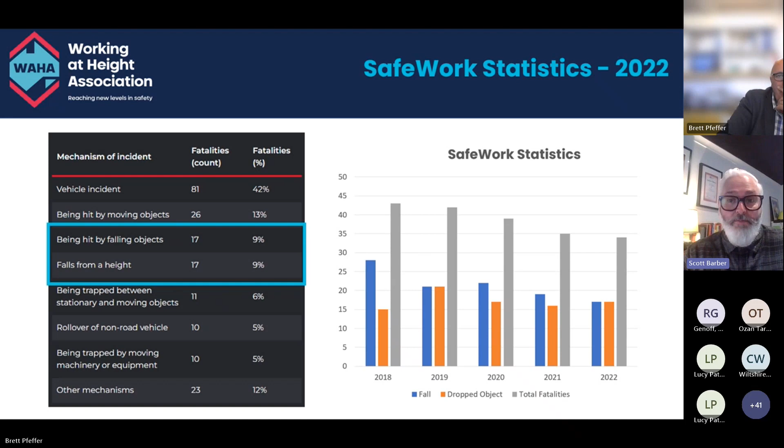But when you consider the amount of emphasis we're placing on this from an industry perspective, from a regulator perspective, obviously there's a gap in terms of what we're doing to really see that drop down to what it should be, which is very low numbers, if nothing at all. So, next one.

So obviously what we're seeing, and why we want this collaboration piece, is that we're not seeing a strong enough shift in that behavior. And we see that as a behavior piece - that's what the indicators are showing, that there is decision making in place around whether systems should be put in place, what equipment should be used, and then how to use it. So how do we address that?

As I mentioned, despite that focus from the regulator and despite the amount of information being provided by those regulators, there seems to be something missing in terms of the education and guidance frameworks. This is what WAHA are trying to do with that collaboration model - provide some more practical guidance tools to help initiate better practices.

With the different associations and so on, what happens is we're not seeing patterns of use, and that's what we're trying to bring together. If we understand the patterns in terms of the nature of the injuries, then we can be more effective in addressing those directly. And then that combined voice means we can actually do things about that as well, and work with the regulators to develop better policy and work around best practice work methods to facilitate those changes if we can find those patterns.

And of course, the education piece - that's an empowerment piece. If we can use these different groups to expand that message and address some of those areas, because not knowing what you don't know is a big problem. And even thinking you know something, but not genuinely understanding what that issue is, is also problematic. So if we can reach a greater stakeholder base, a larger audience with better, more relevant information, then that's when we're going to see more positive change. Next one, please.

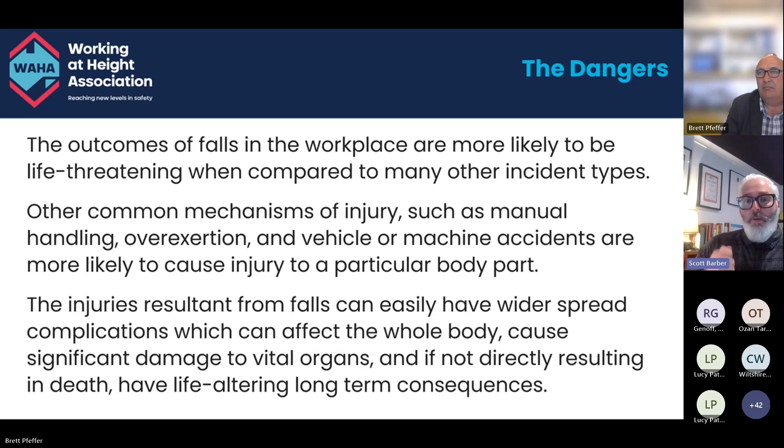The outcomes of falls in the workplace are more likely to be life-threatening, even though they account for 18% of fatalities. Compared to other injury types, the potential fatality is so much greater, which is why a lot of industries and organisations, including the Water Services Association and the Australian Rail Association, see it as a fatal risk factor and one of their top 10 fatal risk factors. When looking at other injury mechanisms like manual handling and overexertion, there are a lot of injuries that can occur in those spaces, but they don't generally have a high expectation of resulting in a fatality. That's why there's such a key focus on this particular area.

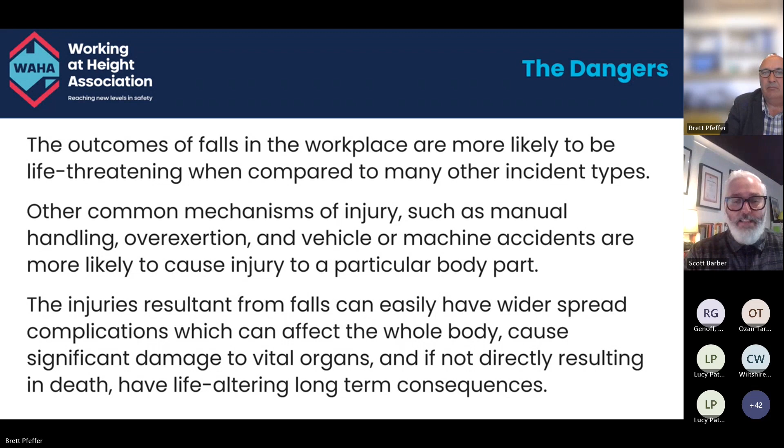Despite advances in equipment, despite legislation being focused on this, despite revisions of standards, there's actually a new standard out for review now if anybody's interested, the 1891.4, which has just gone out to public comment, and that's on the selection and use of equipment. That's quite a relevant one to end users, probably the most relevant one out of all the body of 1891 standards. That's on the Australian Standards website now, and you'll see if you're following WAHA, there's a link to that on our socials and our website.

But despite that, the injury piece is, from anecdotal evidence, which is what we're working with a lot of the time, either static or increasing. And of course, the cost of business in terms of gaining compliance is ever increasing, so the investment in training and resources. We need to make sure that if we're going to invest in that space, the training is relevant and the adoption of those systems we put so much time and effort into developing, be it equipment selection, training, or designing safe work methods for particular tasks, there's a huge investment of time and energy into those spaces. We want to make sure that investment is actually going to deliver a return as far as a safer and more capable workforce. So the next one.

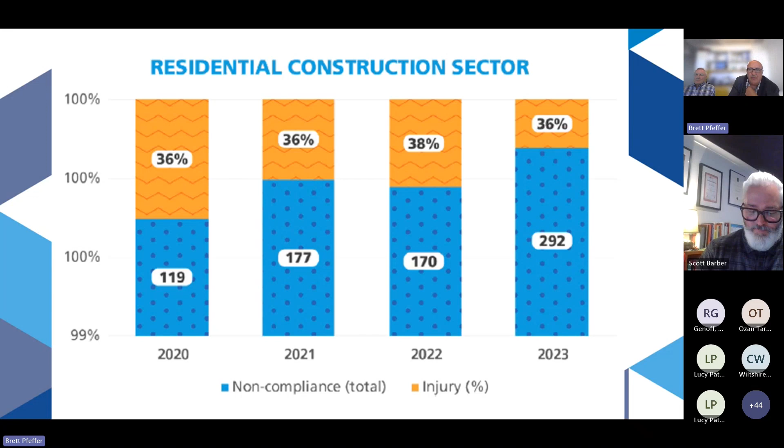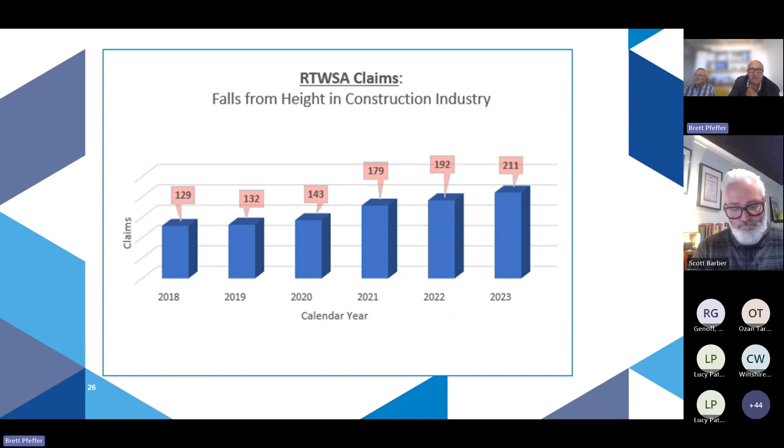So we're lucky enough to get some Return to Work data for you. That shows the previous 6 years, and you can see that through construction, not just residential, it's slowly and continuing creeping up, no matter what efforts we put in place to minimise that.

So before we look at the 2023 campaign findings and trends, I'll give you some background on our South Australian legislation. The model WHS laws commenced in Australia in 2012, but was delayed in South Australia by a year, so we didn't get it until 2013. When the laws were introduced, the regulations associated with high risk construction work activities involving a risk of a person falling more than 2 metres was changed to 3 metres.

This change was made by the residential sector in the misguided belief that no controls were required to minimise the risk of a fall to 3 metres. And as most of us know, most fall injuries are below 3 metres.

Further to this, in 2014, the housing industry lobbied and got the Construction Work and Preventing Falls in Housing Construction Code of Practice disallowed, stating the codes were too prescriptive. Again, the sector did not understand that the absence of the codes did not eliminate the obligation to comply with the laws. It only removed the housing industry's guidance on how to comply with the law.

Then lastly, in 2015, the housing industry lobbied for an increase in the monetary threshold of a construction project from $250,000 to $450,000, to ensure housing projects were not subjected to additional safety requirements as a principal contractor. Again, this is a misguided belief that by raising the threshold, the obligations and responsibilities of the builder would be diminished.

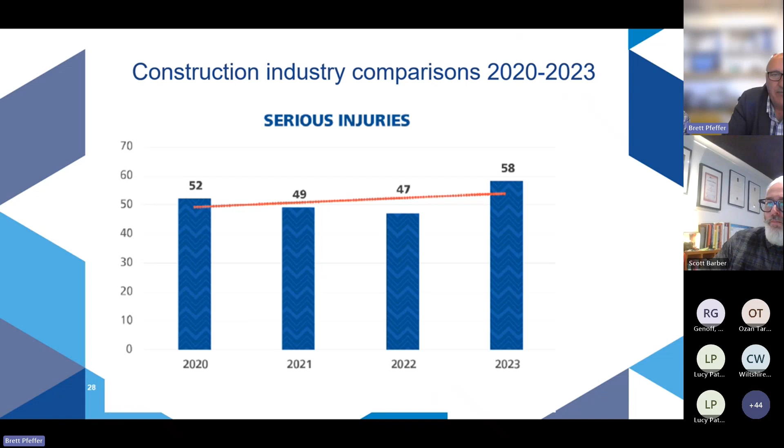And I always say for every prohibition, every improvement has either saved a life or actually prevented a serious injury. So that's a pretty high stat there.

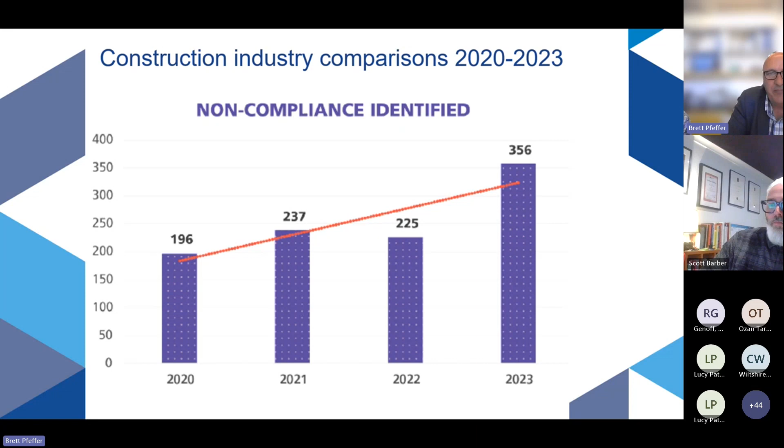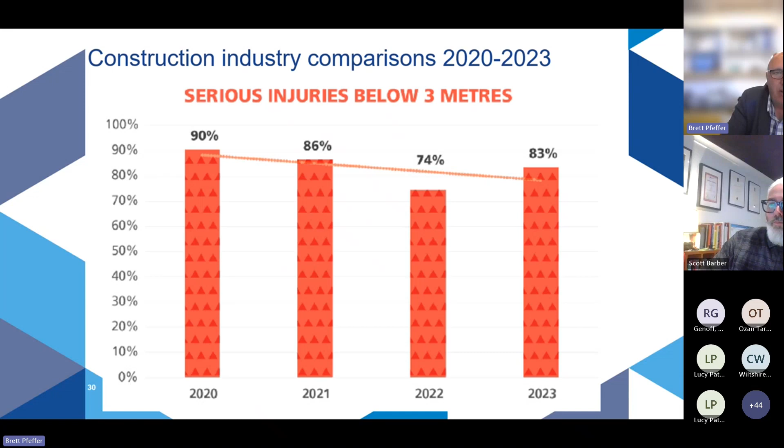While we saw a continued decrease in the number of serious injuries below 3 metres between 2020 and 2022, in 2023 we saw an increase back to 83%. I chose 3 metres because that's the threshold for SWMS, and you can see a lot of serious injuries are below 3 metres.

Managing high-risk construction work requires a safe work method statement. SafeWork has developed a lot of guidance material, including a recently published SWMS template, and SafeWork Australia has developed an interactive SWMS guidance tool with step-by-step information, videos and examples. Paul will talk about that later. Although we saw a good improvement in 2021, primarily due to a SWMS campaign and information on the website, we've seen it steady around 34% failure to comply with high-risk construction work.

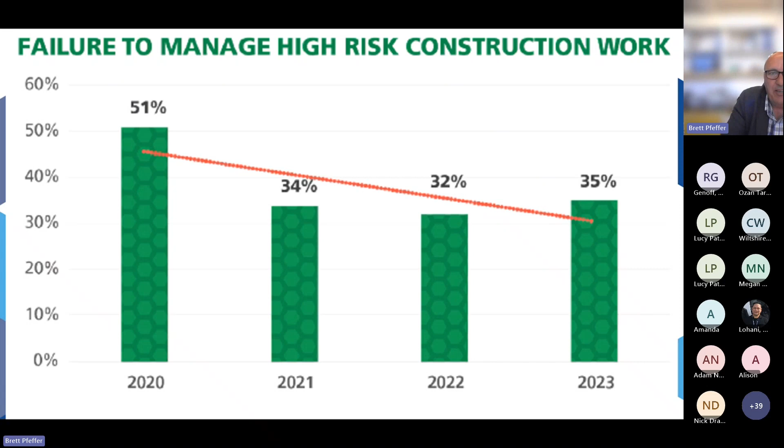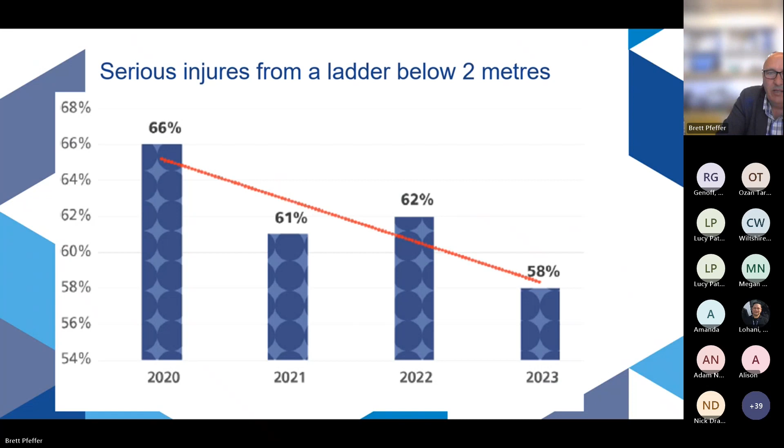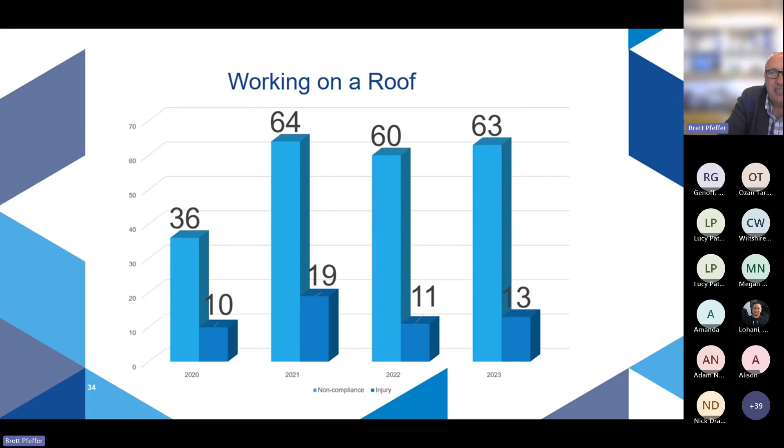As an activity, working on a roof continues to be high-risk, but here's some data from our 2023 snapshot. Carpenters and steel framers had the most serious injuries and non-compliances, though we've also seen a significant risk of working in unprotected voids, particularly stair voids.

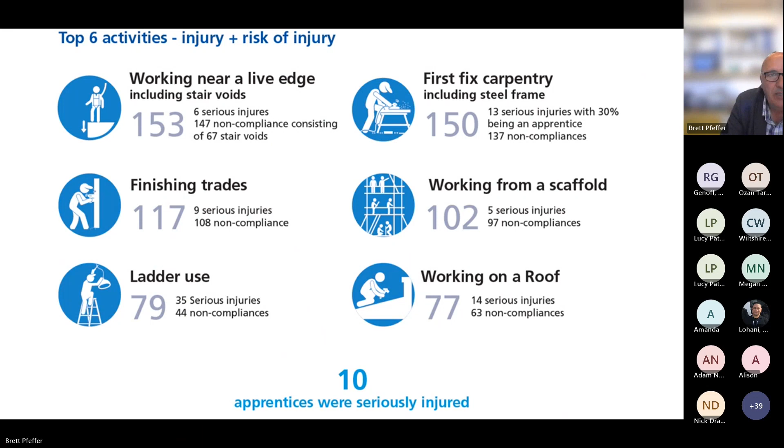What have we got there? Yeah, very high. Yeah.

In 2021 and 2023, SafeWork SA undertook a managing risk of falls in residential construction campaign. The objectives were to measure compliance against the managing risk of fall regulations, and to ensure that persons with management control of the workplace, for example a builder engaging a contractor, met their shared WHS obligations and responsibilities. Let's start by looking at what the work health and safety regulations require you to do to manage the risk of a fall.

Unfortunately I put up the wrong presentation, so the link's not embedded. On our website we've got videos on managing risk of falls and the hierarchy of controls, which I recommend you go and see, but we're starting to run out of time so we might have to move on.

I'll just give some background on the campaign. Between the 3rd of July and the 29th of December last year, SafeWork inspectors attended 90 work sites and completed 142 audits across multiple duty holders. These consisted of 90 contractors, 58 persons with management control such as builders or a PCBU engaged contractor, and 47 of those sites met the definition of a construction project.

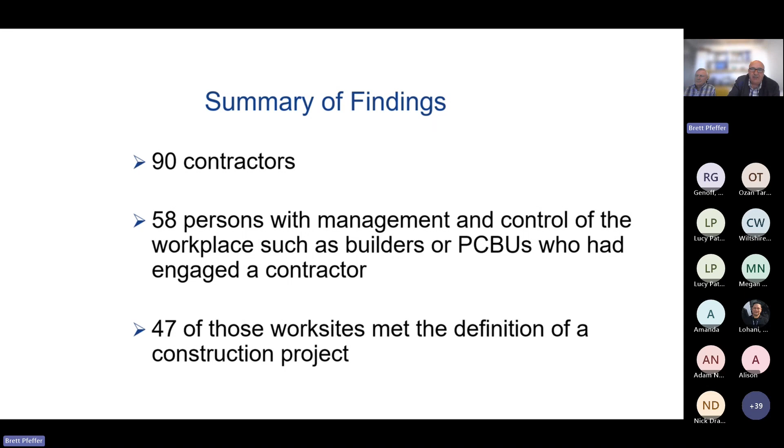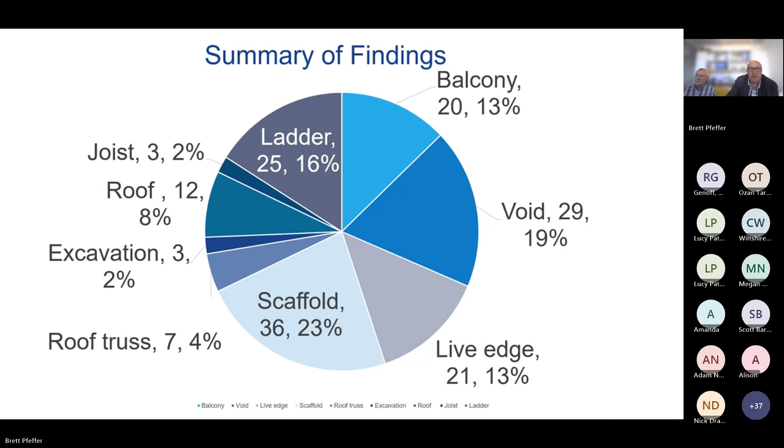You can see by that graph, 156 elevated workplaces were identified. We just have to move a bit faster, Paul. Sorry.

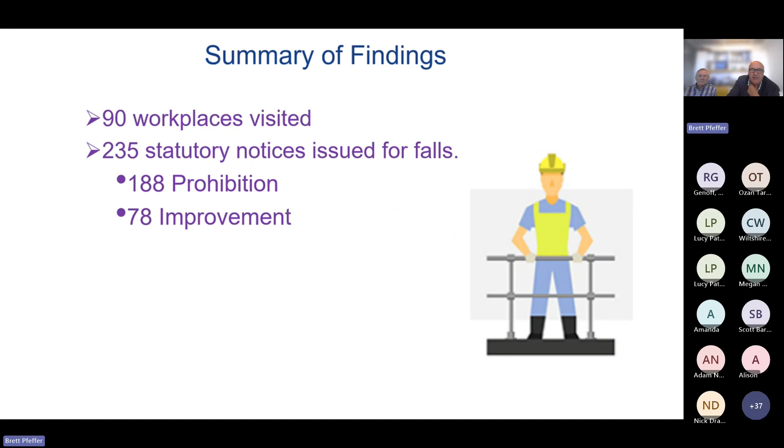That campaign identified 266 breaches, resulting in 188 prohibitions and 78 improvement notices. It's very unusual for a proactive compliance activity to have more prohibition notices, although these results were similar to the 2021 campaign. So the results again make it clear that the residential sector is not doing enough to protect its contractors and workers.

With the Managing Risk of Falls campaign, 188 activities were prohibited, requiring immediate stop of the activity because of immediate risk, and 35 required improvements. 22 improvement notices were associated with failure to comply with or prepare SWMS, and 21 improvement notices were given to principal contractors for failing their duties - they must have processes in place for ensuring compliance with falls or ensuring that the SWMS is compliant.

There were other things identified during this campaign. To support the Nowhere to Go campaign with Electrical Trades Union, we also looked at toilet facilities - out of those 90 audits, 79 failed to meet compliance. Additionally, a further 88 statutory notices were issued for other non-campaign related breaches, consisting of 24 prohibitions and 64 improvements.

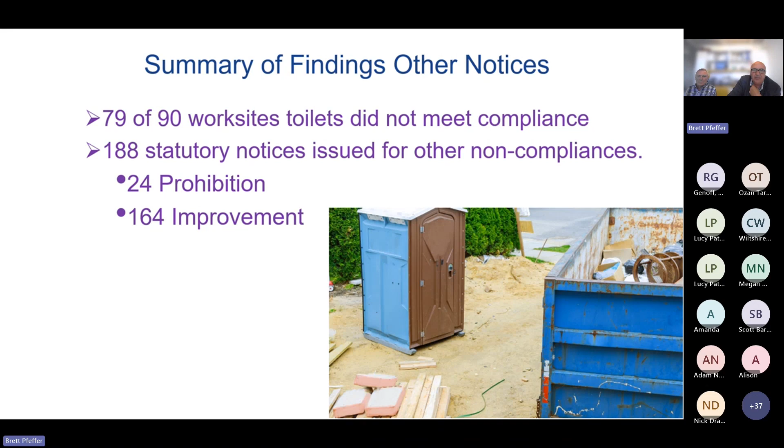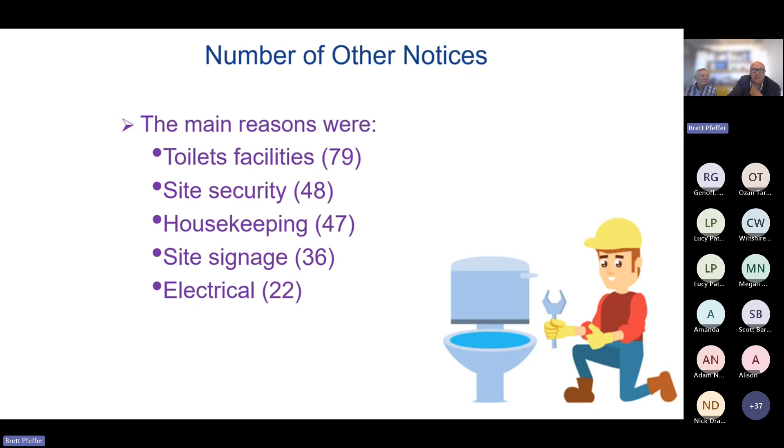So just look at those - toilet facilities 79, site security 48, housekeeping 47, site signage 36. Site signage is for a construction project, and electrical issues comes in 5th.

There's another video which I'd recommend going to on our website. It aligns the hierarchy of control with the hierarchy of controls for managing risk of falls. I think it's a very good video, and I recommend you go see it.

Thanks, Brett. So far, we've looked at the overall data from the 90 site visits, and so what does the law require you to do to eliminate or minimize the risk?

I'm not putting that video over. No, let's move on. So we've just got a photo gallery here.

To minimise risk of fall, work must be planned through safe design to eliminate risk where practical. Work sequencing is another way to eliminate risk where practical, by doing some of the work on the ground and following construction.

Had we watched the videos, you would have seen that portable ladders are the lowest form of control, even lower than a harness. Yet we continue to see portable ladders as a go-to equipment for working at heights in the residential sector.

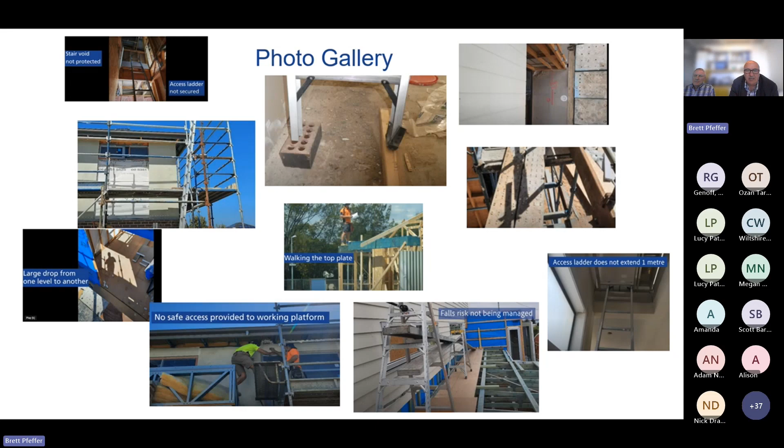So these are some photos taken through the campaigns. We'll just quickly go through. There you go - there's a stair void, unprotected, access ladder not secured or set up correctly.

There's a carpenter standing on a top plate, no protection. You might not be able to see it, but right below him is an A-frame ladder right on the edge. And a bit more to the left, there's an access ladder not secured or set up correctly.

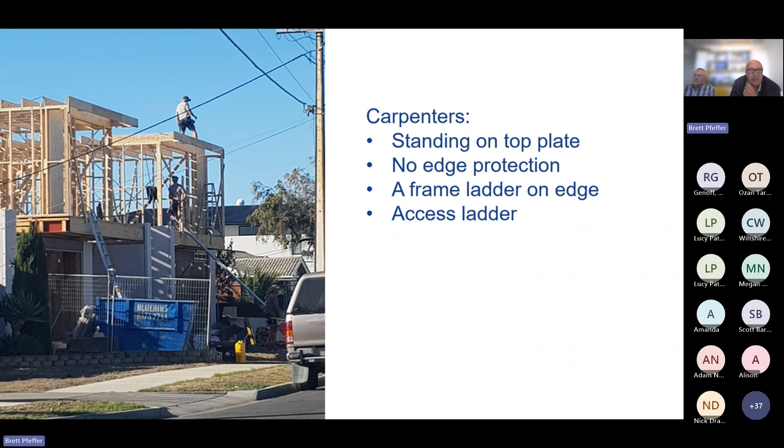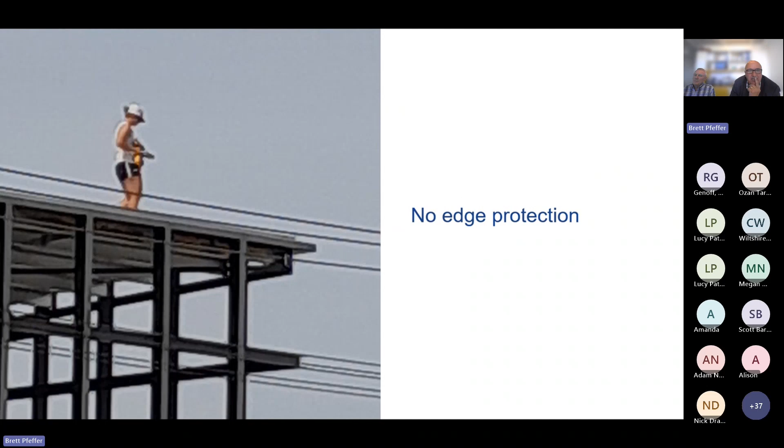It does look a bit commercial, but it was residential. That's quite a high way up, probably about 7 meters. Absolutely nothing in place, and that person actually ends up going right to the edge of the building.

There's carpenters again - inappropriate use of the ladder. You'll see that this person set their extension ladder up on the back of the ute and climbed up.

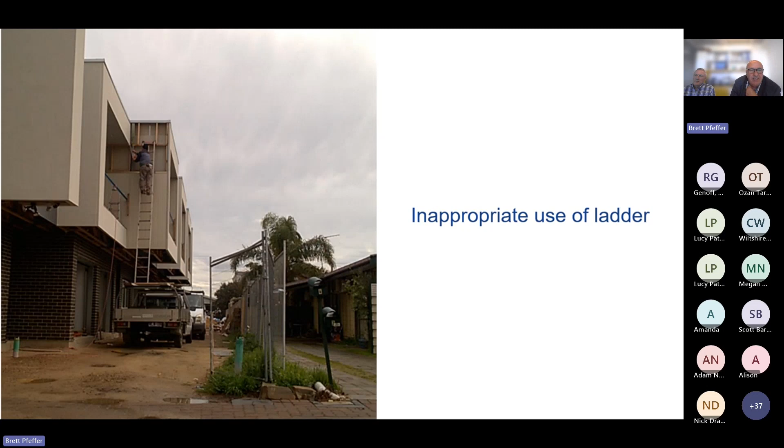I would assume that building originally had a scaffold around it. Probably poor planning - removed the scaffold because of cost, and then had to come back to do something. When you look at that, probably an EWP would have been a better option.

Again, there's some glaziers there. You can see the access that's not set up properly - they're right on the edge. I know the roof line hides it, but they're working right to the edge.

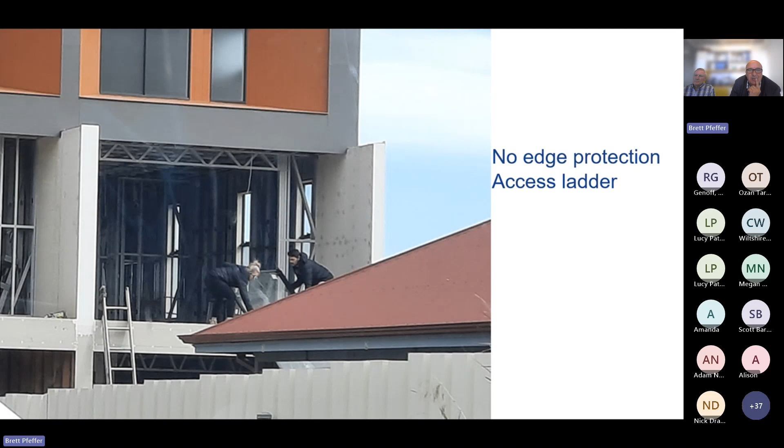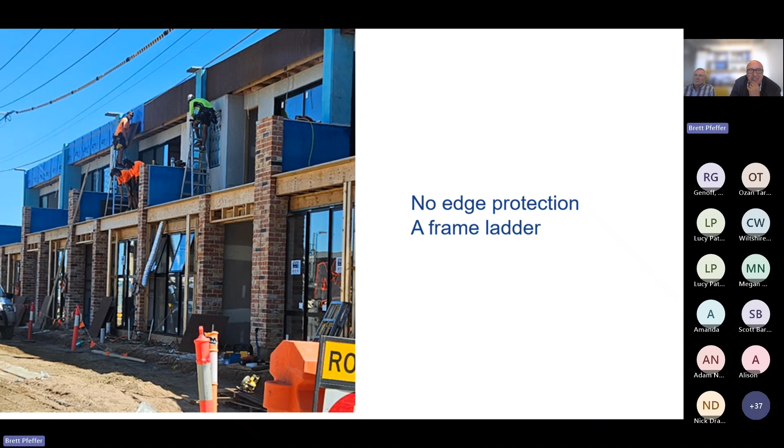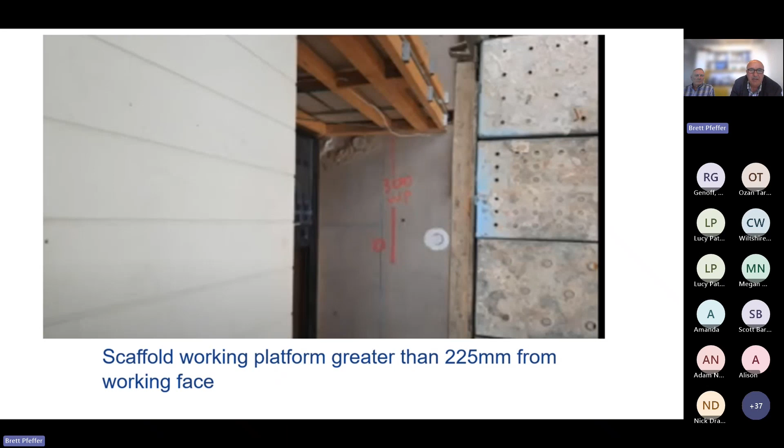So we saw a lot of scaffolds through the campaign. Obviously, scaffolds against the working face can't be greater than 225 millimeters, otherwise it becomes a fall risk. With a large drop from one level to another, vertically it should be 300 mil.

It's hard on the left side here. You can see the platform, but there's actually a large drop down to the next level.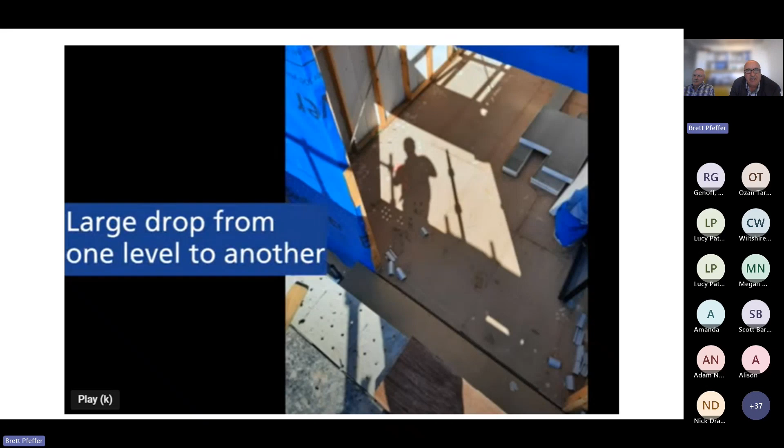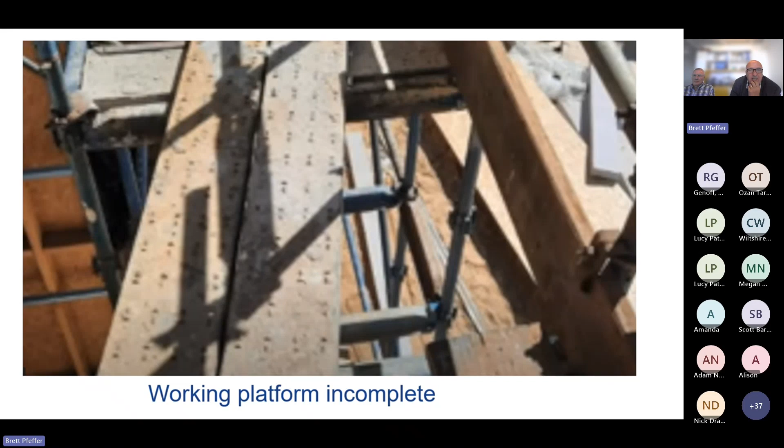Here you can see a big gap, unguarded, just throwing some planks across - so you're walking the plank to get across the other side.

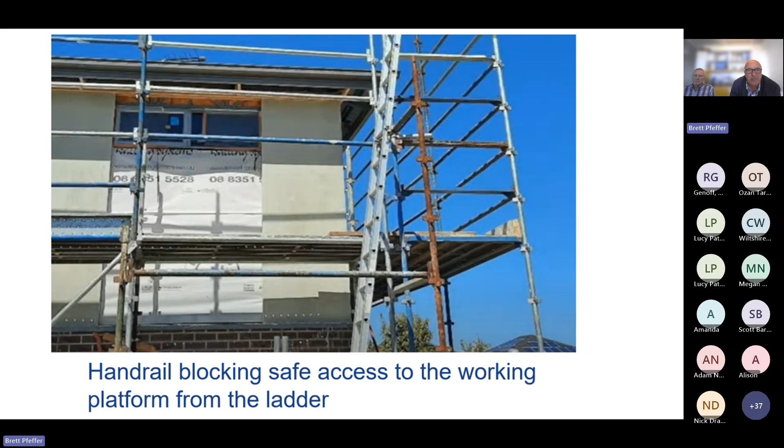Here you can see the access ladders of the scaffold, and it's got a handrail going across, so that's actually getting in the way of a person accessing or egressing, which can create a fall risk. This is access on the working deck - that should be a gate.

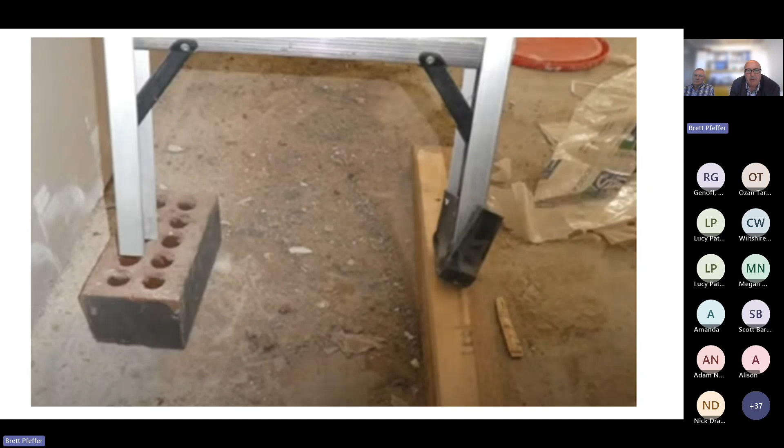Here's an access ladder for an internal void - just trying to get that a bit more height. And that's the other end - they couldn't get enough height, didn't extend 900 millimeters past.

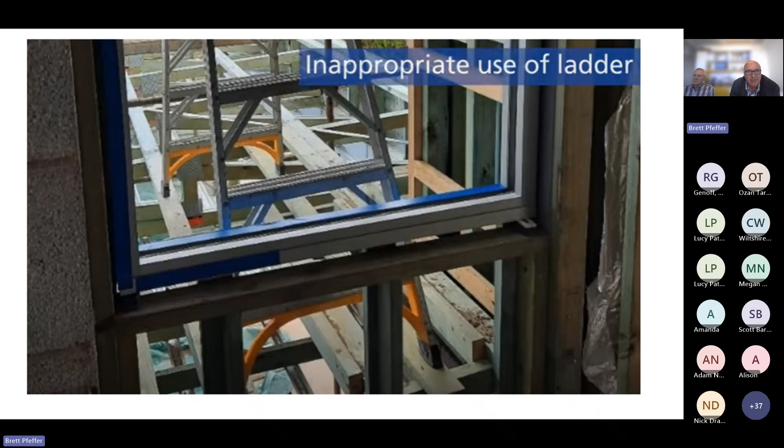Here's the inappropriate use of the ladder. You can see on the second level, they're just trying to sit on some planks there - quite dangerous.

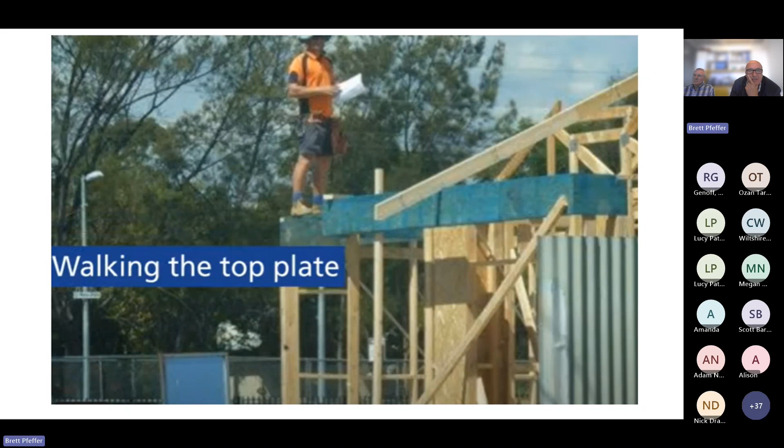Carpenter again, walking on top plate. This is scaffold set up without safe access to working decks - this person's had to go on a balcony and try to step across.

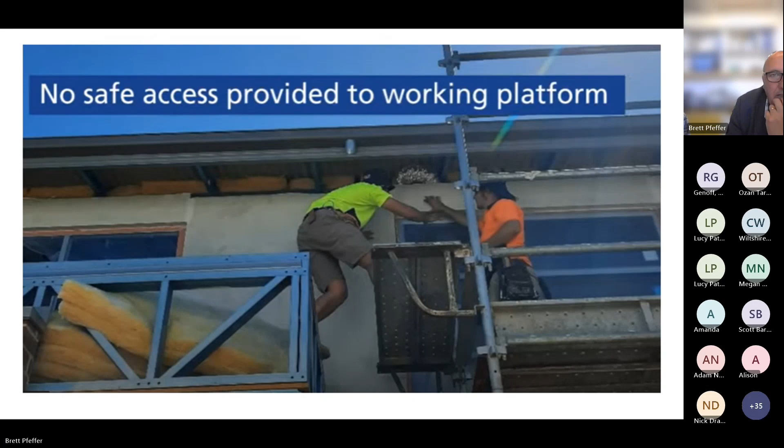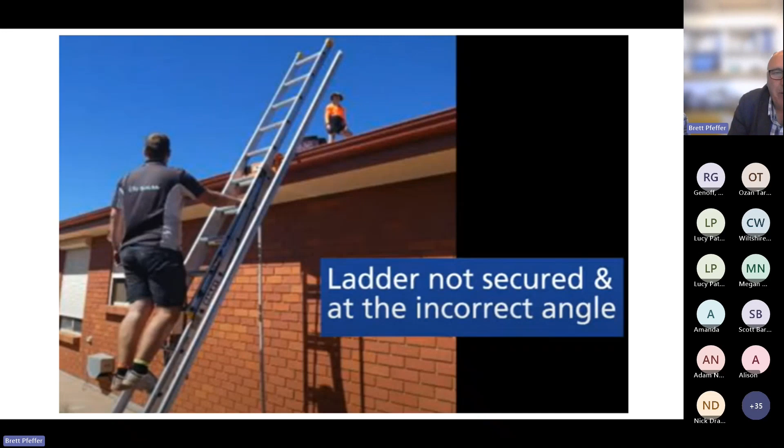Solar panel - just poor ladder setup and no edge protection. Yeah, no edge protection, ladder set up incorrectly.

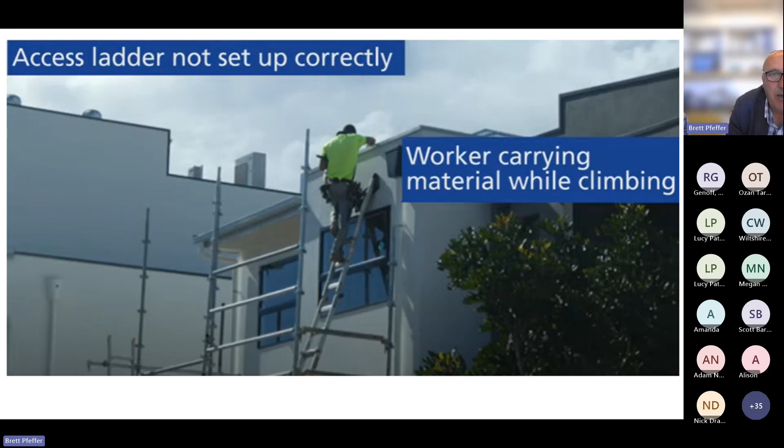Poor ladder setup - worker climbing up, actually holding material, so you can't maintain 3 points of contact. Standing close to the edge.

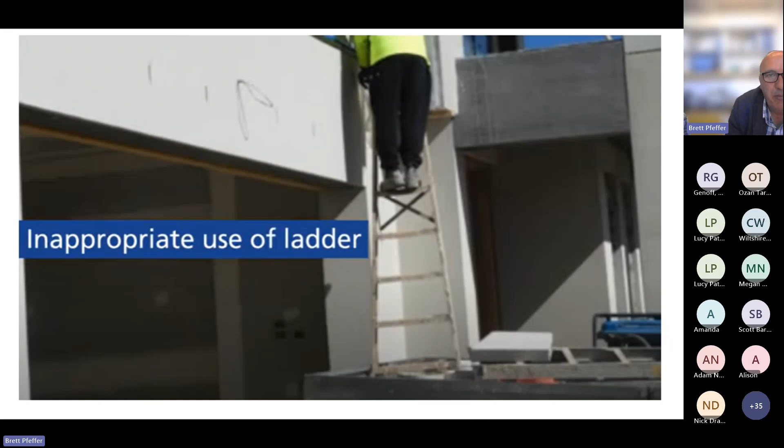Another one with a previous ladder, so a ladder off the back of a ute to get that additional height. You can see here, no edge protection.

Standing on top plate, portable ladder - one of the worst things you can do. Very unstable, very dangerous.

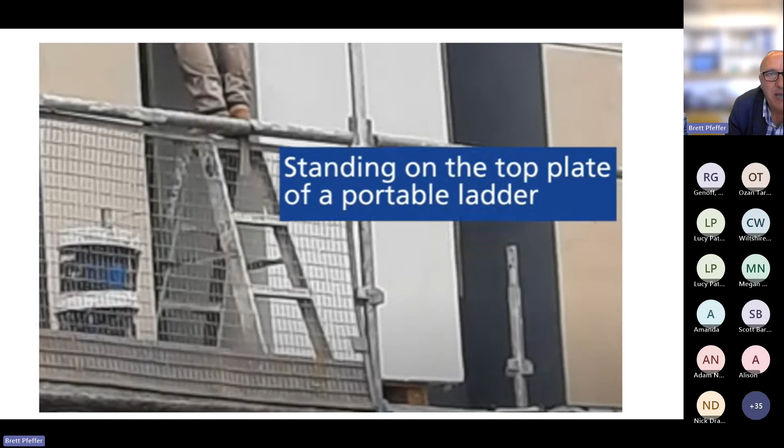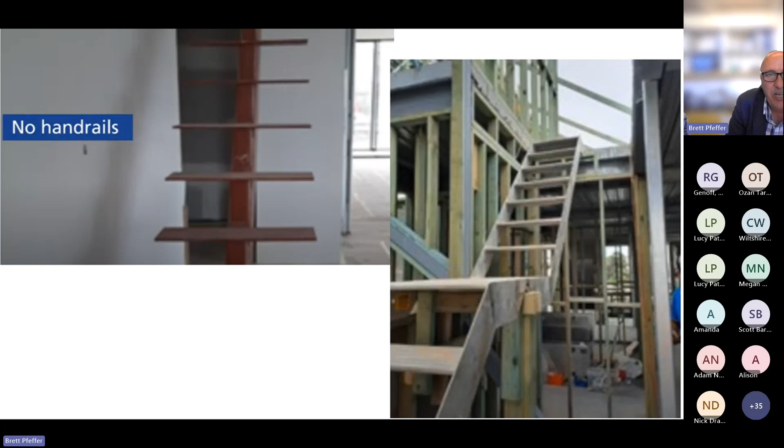Stair access, no handrails either side. The one on the right is a good effort, but you're missing the handrails again, so you're creating a fall risk even though you're trying to control a risk.

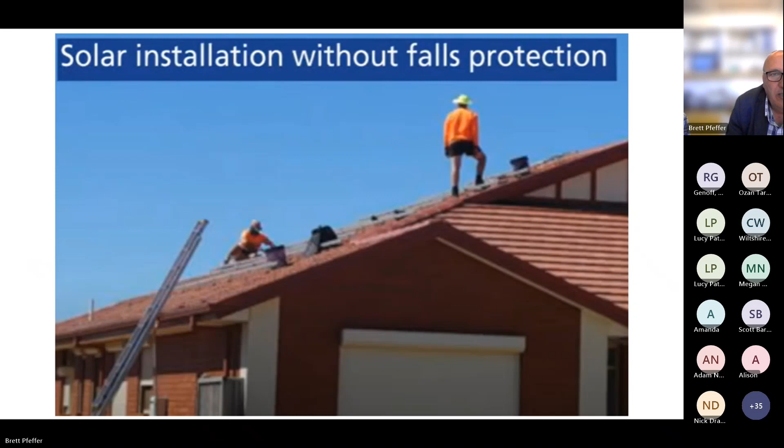Solar installs without fall protection - it's reasonably practicable to put a handrail across the working face. Incomplete scaffolds, you can see there, you can walk off the edge. More incomplete scaffolds.

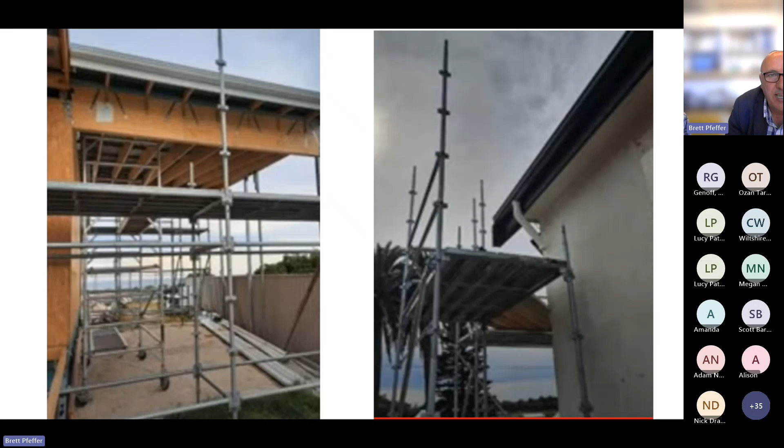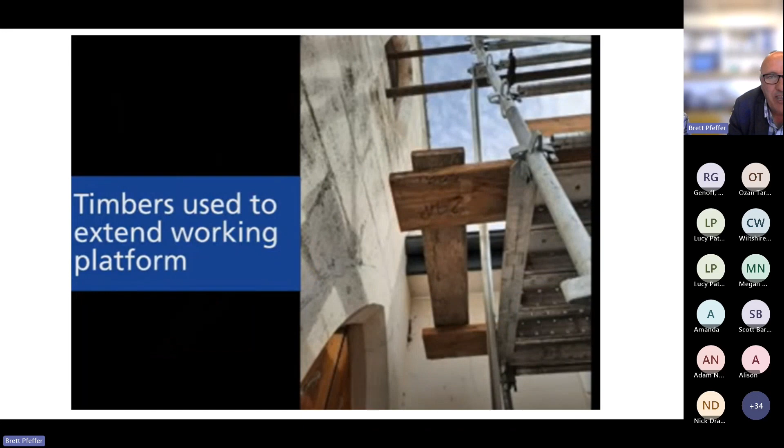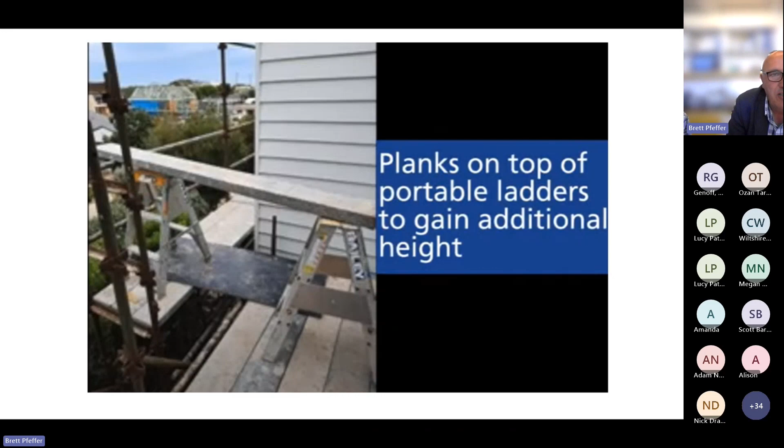Timber made up to extend and close a gap was inappropriate because sometimes people do these things and it could give others a false sense that it's safe. If someone stepped in that, they could have fallen, potentially injured or killed themselves. There was also a plank placed on top of portable ladders to gain additional height, putting feet above the handrails, which is quite dangerous.

All right, so continuing, we'll call that contract management. Subcontracting is a major feature in the residential construction sector, and the contracting out of WHS duties by builders can have negative health and safety effects on contractors' workers.

Subcontracting can encourage a culture where the objective is to get the job finished as quickly as possible with minimum attention to safety, so managing contractors are a key component of the campaign.

Under the revoked OHS law, pre-2012, there needed to be a direct link between the employer and the employee. That left a lot of duty holders not being held accountable for their acts or omissions, even though they had a lot of influence, and there was no law to prosecute them for their failures.

With the introduction of WHS legislation, the definition of 'worker' is quite broad now, including employees, labour hire contractors, subcontractors, and volunteers. I'll just ask Paul to explain that requirement.

Thanks, Brett. Based on those photos, there's a lot of room for improvement. I agree. As a builder or business, you owe a duty of care when you direct or influence work carried out by a worker, engage or cause to engage a worker to carry out work, including through subcontracting, or have management or control of a workplace. The primary duty of care applies to all businesses regardless of the terms of any contract.

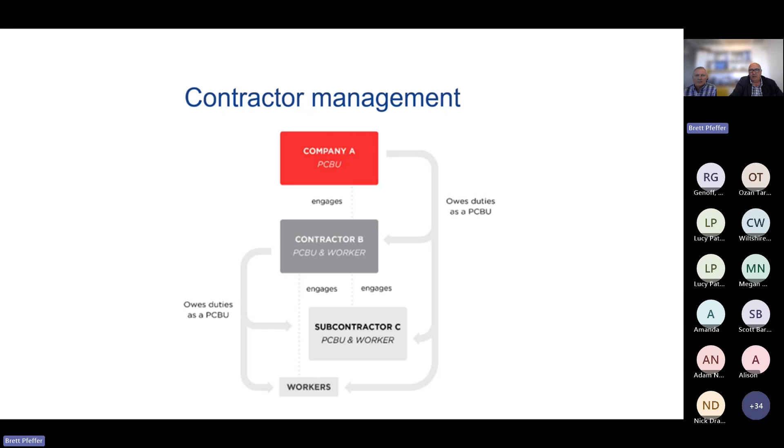This process can range from directly discussing and planning daily work with contractors, for example pre-starts, to establishing formal mechanisms with written agreements and consultation meetings such as toolbox meetings.

Thanks, Paul. So effective contract management is one key principle of the legislation. During the campaign, 58 worksites under the management control of a business, typically a builder, were examined. There appears to be a disparity between the arrangements made by the builder and the significant risk the contractor faces working at height in their workplace.

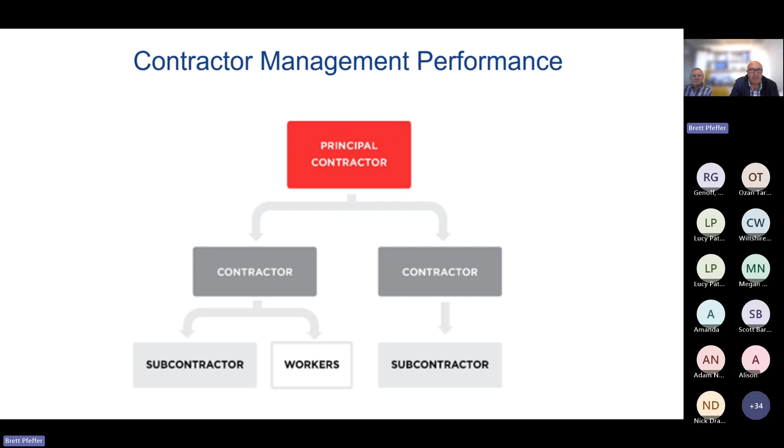The campaign results identify that builders need to work more closely with contractors working at height and monitor contract performance against the arrangements made.

During the campaign, a number of audits identified workers working above 3 meters, which requires a SWMS for high-risk construction work. Paul will give a quick overview of the regulatory requirements for a SWMS.

Thanks, Brett. There are 18 activities classified as high-risk construction work in the legislation due to their significant potential for serious harm often associated with those activities. A high-risk construction work SafeWork method statement is a document prepared in consultation with all relevant persons, including workers, that accounts for the workplace-specific circumstances that may affect the way the high-risk construction work is done.

A SWMS needs to identify the hazards and risks associated with the high-risk construction work, and describe to workers in clear terms how the following control measures will manage those risks. As a minimum, the SWMS must identify the work that is high-risk construction work, state the hazards and risks to health and safety from that work, clearly detail the measures selected to control those risks, and describe how the risk control measures will be implemented.

The SWMS also needs to take into account the circumstances at the workplace that may affect the way the work is carried out. For example, if the work is carried out in connection with a construction project, will there be a WHS management plan in place at the workplace.

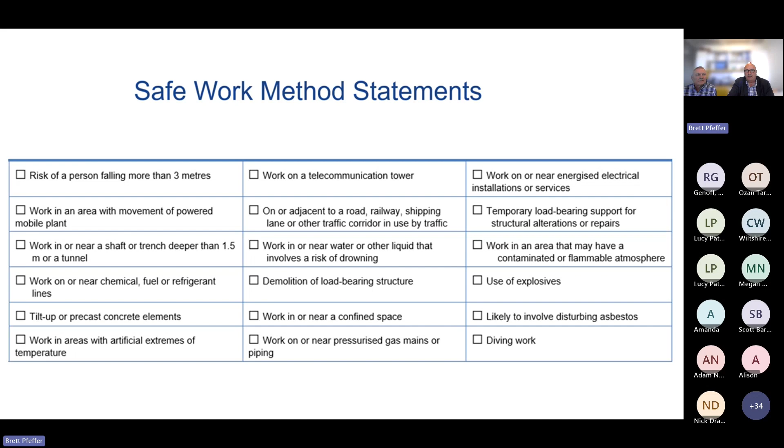Thanks, Paul. SafeWork's been working in the industry since 2017 on high-risk construction work, so both me and Paul have been here a while. We've seen some good improvements in the commercial and civil construction sectors, so it'd be good to see improvements in the residential sector too. For a construction project involving work valued at $250,000 or more in South Australia, there's a requirement to have a principal contractor with management control of the workplace.

The one thing we'll point out about that principal contractor on a construction project is that they must take all reasonable steps to obtain a copy of the SWMS relating to high-risk construction work before it commences, and must also have in place arrangements for collecting, assessing, and monitoring and reviewing the SWMS.

They also have further duties relating to specific regulations, such as managing risk of falls, falling objects, first aid - specific duties. Under those, the principal contractor must put in place arrangements. It's not good enough to just have an arrangement with your contractor that they will do something - you've got to ensure those arrangements are actually in place. There's an extra step required, such as photos, certificates, or something to demonstrate to the principal contractor that those controls are actually in place.

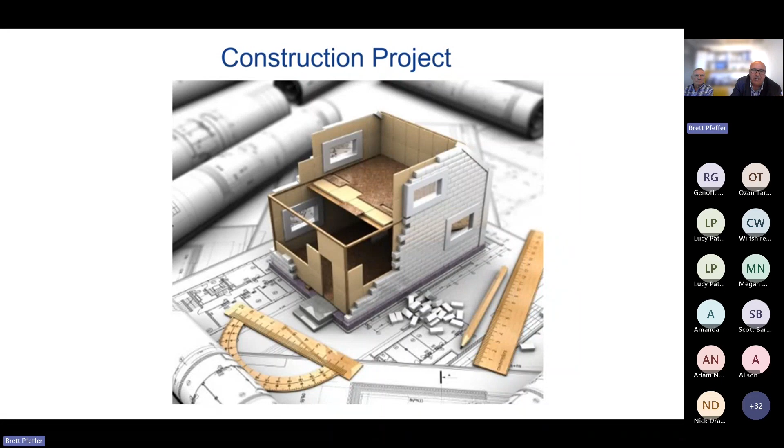But we did see through the campaign that the SWMS are not getting checked enough. It's just being treated like paper, and everyone knows that paper doesn't save anyone.

Just want to talk about scaffolds. Obviously scaffolds are erected to assist in accessing areas of height and to aid safety on a work site. Incorrect installation, unauthorised alterations, and use can make a work site more hazardous. Unauthorised altering of scaffolds by untrained, unlicensed contractors is common in residential construction, and can lead to poor safety outcomes for persons who need to use that scaffold.

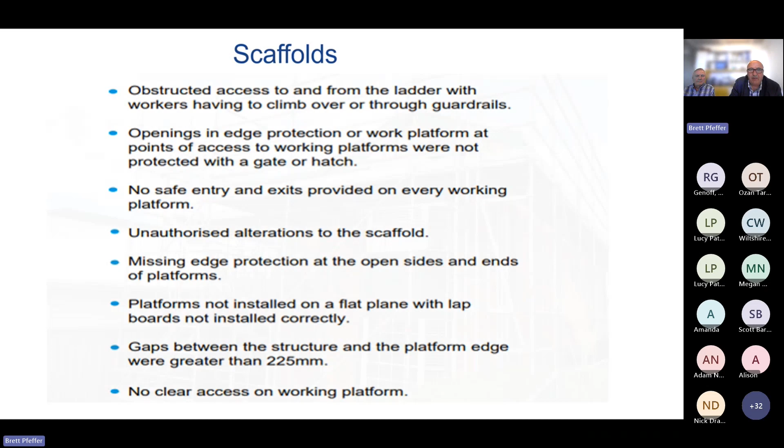The failure to maintain a scaffold was a major issue identified during the campaign. During the whole of 2023, there were 373 statutory notices issued against scaffolding - 165 prohibition notices and 208 improvement notices. While it's good to see a high number of scaffolds being used, a one-size-fits-all approach doesn't work due to the different types of work activities carried out on scaffold. The scaffold needs to be continually altered to suit each and every situation, with alterations only being done by a competent person.

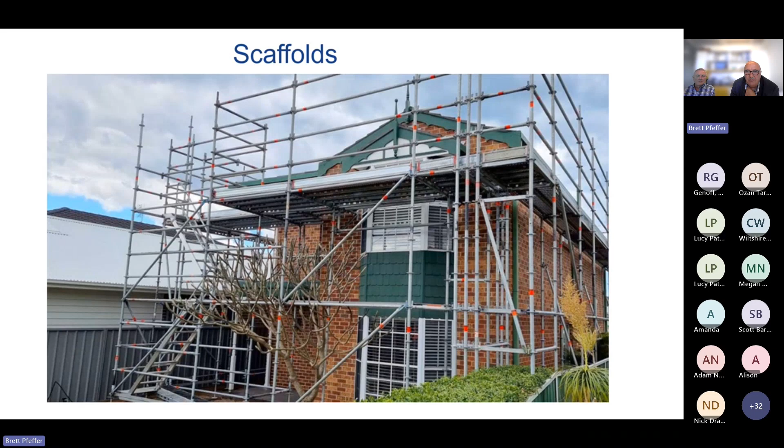Most non-compliance identified on scaffolds during the campaign was caused by unauthorised alteration to the scaffold.

Just quickly to talk about portable ladders - they're one of the least stable but most commonly used tools, as we saw earlier for working at heights. Incorrect selection, setup, and use of ladders can result in a fall. As we saw earlier in the hierarchy, ladders are at the very bottom and are lower than harness use.

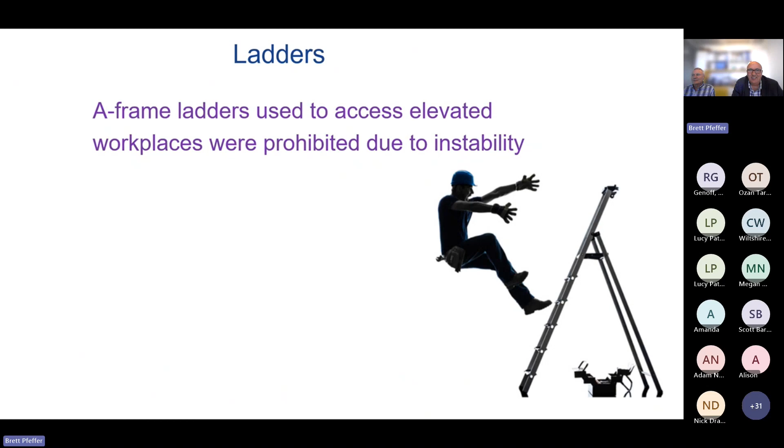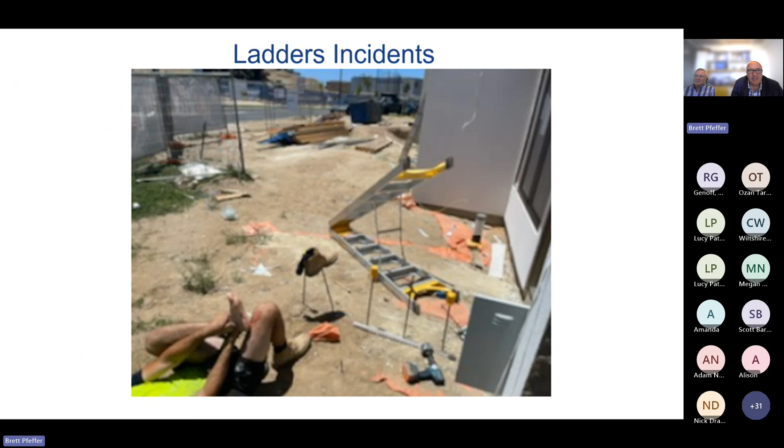A while ago, we received a notification of a serious injury. In that image, the worker was working off an A-frame ladder and fell, but his foot landed on the rebar - almost in the centre of the photo you can see where the boot's stuck in the rebar. That's an actual photo taken by a co-worker on site. Had the worker landed differently, he could have been killed.

So to improve worker safety in the residential construction sector, the focus needs to be on managing scaffold, ensuring it's fit for purpose and maintained in a safe condition.

Contractor management is also key, so have a conversation with your contractors or builders. Builders need to check whether they have systems in place to manage the risk of falls, and confirm that contractors are following established arrangements.

Portable ladders can be sensible and practical options for working at height when other equipment isn't reasonably practical, but they should only be used for low risk, short duration work. Ladders being the only option to work at height needs to stop, because the law requires workers to work from a solid construction, and ladders are just unstable.

SWMS are high risk construction work, so contractors must have site-specific SWMS that are being followed. This should be on our website today or very soon. We've got a completed SWMS example for first fix carpentry on a double-story house near a power line, to help people understand how to map it out.

Principal contractors must have arrangements in place for ensuring compliance with falls management.

SafeWork SA has a lot of guidance material available on our website. We've got information on contractor management, principal contractors, high-risk construction work SWMS, elevating work platforms, fragile roofing, scaffolding, scaffold access and egress, edge protection, solar panel installation, installing prefabricated roof trusses, and installing roof battens.